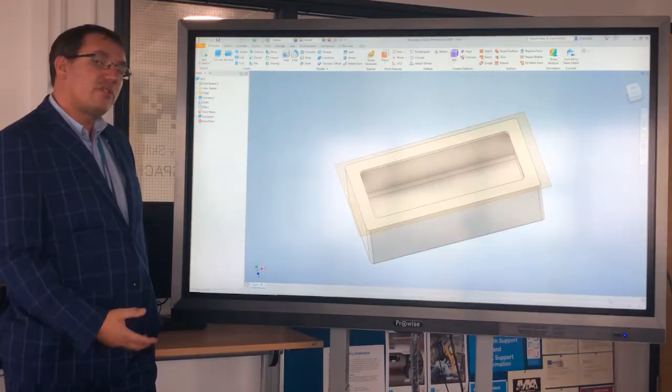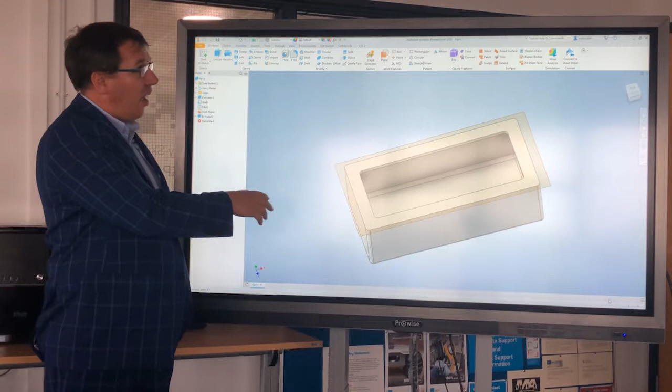Welcome to my first Inventor 2020 tutorial. In this tutorial we're going to look at how we created a simple box, shelled out the box, and then created a work plane on it for us to build a return flange. I'll show you one way—there's multiple ways of doing this, but I'll show you this basic simple way. We're also going to make this fully parametric and constrained so we can size it to whatever we want.

We're also going to look at how we utilize the model tree down the left hand side of the screen to keep track of what's going on in our model itself.

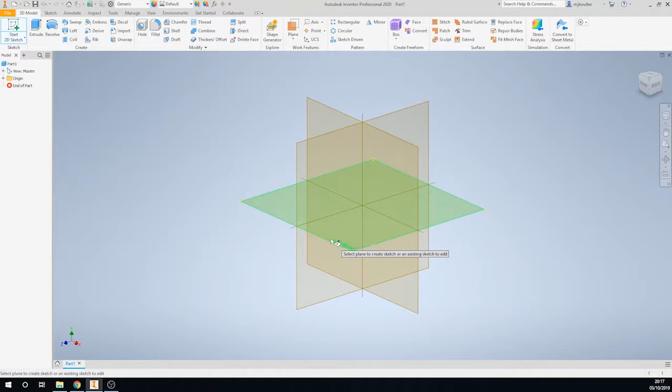So let's jump straight in, and we're going to create a two-dimensional drawing on the plane. Don't forget to revolve round so that horizontal is horizontal and vertical is vertical. We're going to create a simple box around the center point, and once completed, use the vertical constraint, finding the midpoint and constraining it to the center of the axis. We'll do the same with the horizontal plane, find the midpoint and constrain it to the center of the axis.

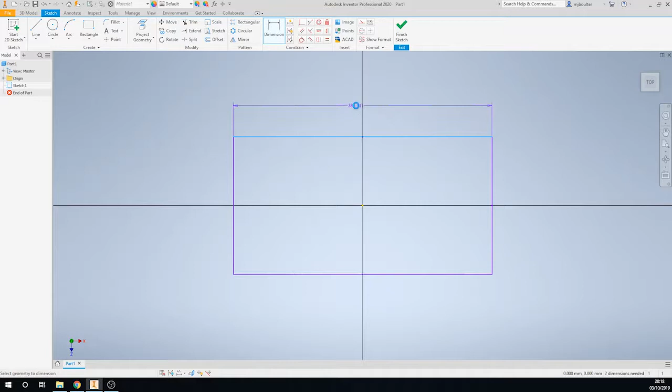We're now going to dimension the width, and I'm going to use the parameter width equals, and add the width that I want. Do the same with the height, calling it height equals, and add the length parameter that I want there.

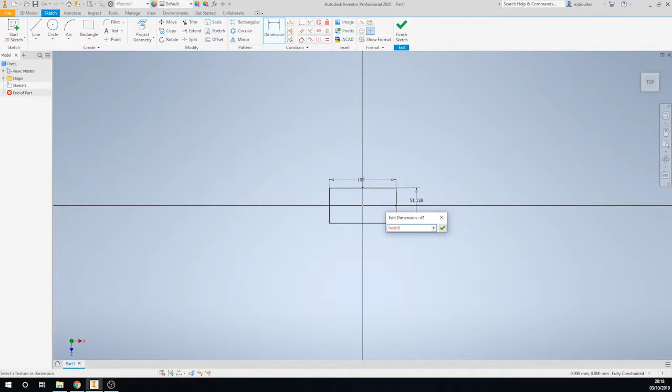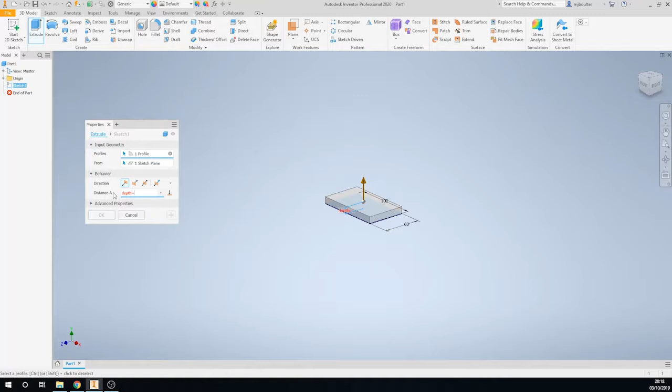Once we've done this, we can finish the sketch, and then extrude it. As it's only got one sketch, it knows it's going to extrude it, and we're going to extrude it to a depth equals, then the depth you want to extrude it to. Click OK, and there we have the extruded box.

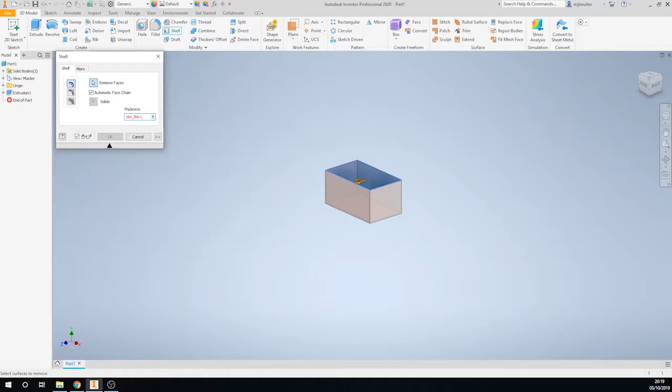We're now going to shell the box out. We're going to shell the interior of the box out to a skin thickness, SKN_THK for my abbreviation, and we're going to give it a skin thickness of 2mm, which is what our 3D printer is good for.

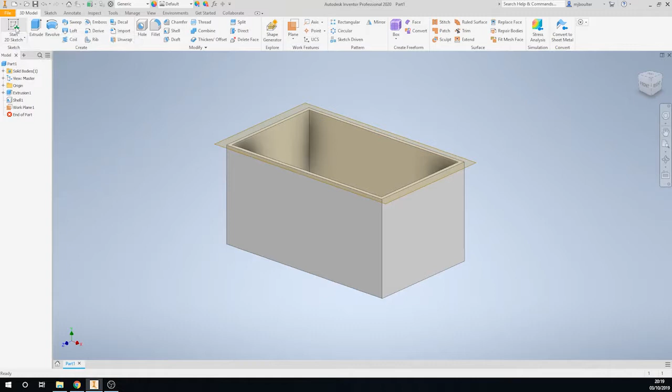We're now going to create a work plane across the top, selecting the two outside edges to create this work plane. Then we'll create another two-dimensional drawing on this work plane. The first thing we'll do is project all the inside edges through onto that work plane, and then offset them to a random measurement.

Because now what we're going to do is dimension that offset, and call it flange, because this is going to be our internal flange. So flange equals, we're going for 6mm.

We can finish that sketch, and extrude that flange section. We're going to invert the direction, and select from the list of parameters our skin thickness, so it's the same, and then click OK.

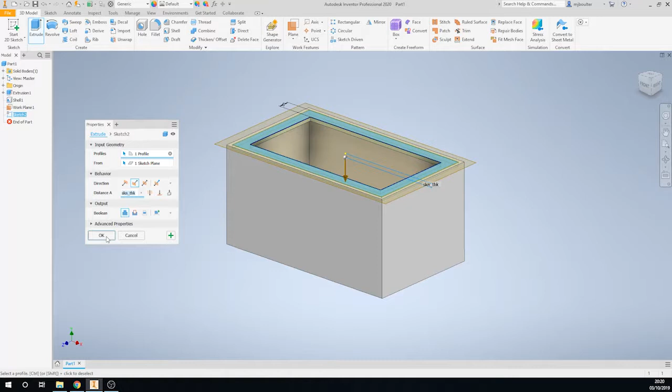So we're now going to do another two-dimensional sketch on that surface, and this time project the outside edges and project that geometry through to that plane. This is going to give us our lid.

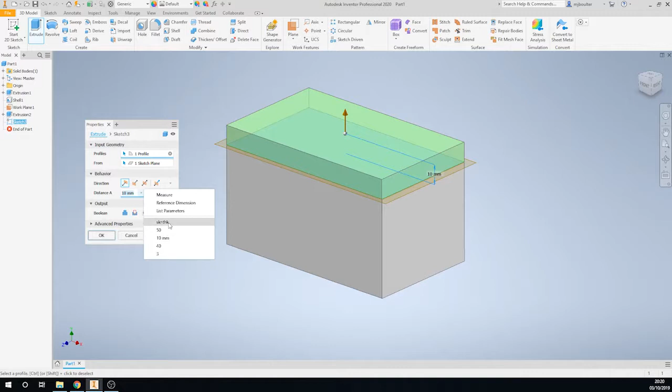So we'll finish that sketch, and extrude the lid. It's extruding the right way, but this time we're going to create it as a new solid, and give it the same parameter of the skin thickness. Click OK.

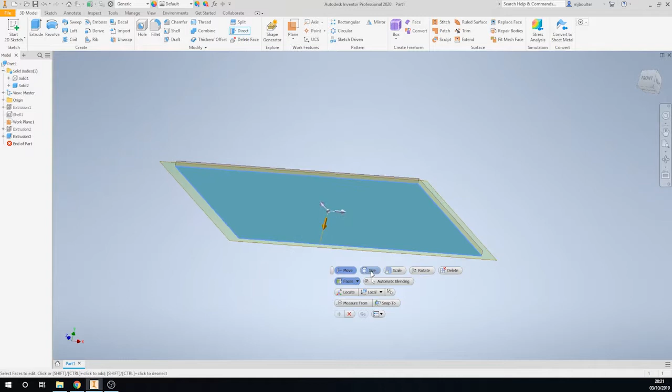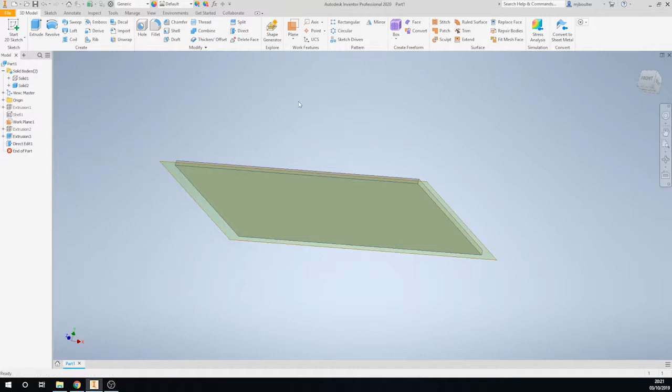We're going to turn off the original box solid, turn the visibility off, and rotate round to have a look underneath. We're going to use the direct function and push the surface back 0.2 of a mil using that little golden arrow, then create the parameter gap equals minus 0.2, because that's the gap our 3D printer needs. We'll cancel that, make the box visible again, and check that we've got a little gap running through the whole lot.

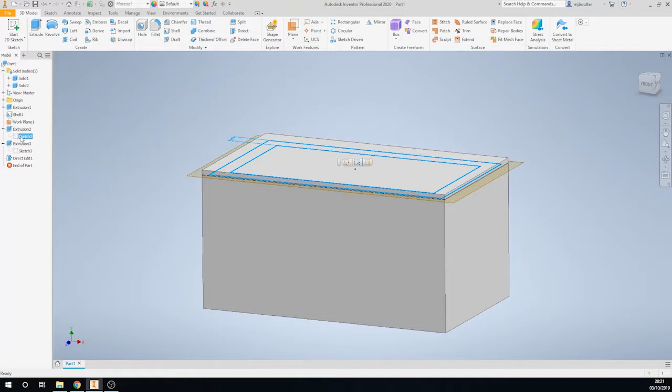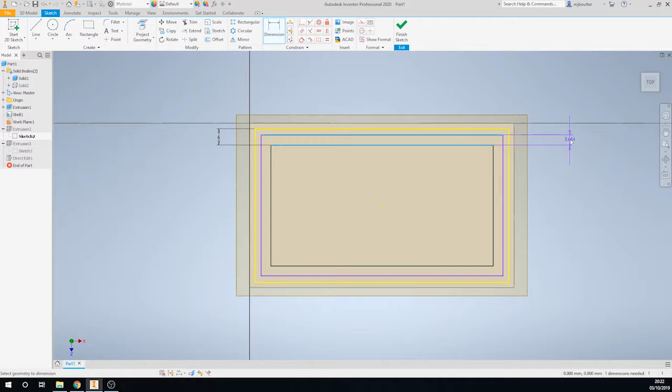We're going to make this sketch, the original flange offset sketch, visible, and edit it because we're now going to create the path for our O-ring to sit in. We'll offset the inside measurement by any random amount, because we're then going to dimension it as half the width of the flange. We can select the measurement from over here, divide by 2, and click OK, so that it will always be half the distance in from the flange.

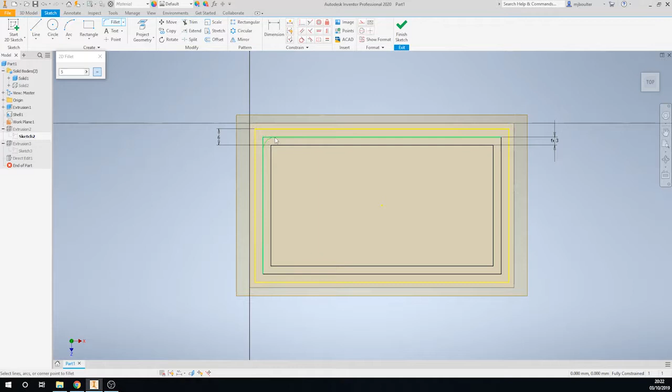We're going to put some radiuses around the corners so that the O-ring has a bit more of a chance of sitting round. So we'll put a 5mm radius on all of the corners that the path for the O-ring will sit, then finish that sketch.

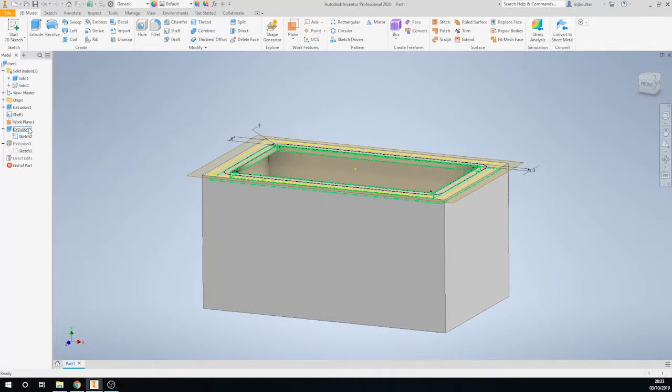We're going to hide the lid now, turning off its visibility, which will help us working on this sketch. We're going to make the mid-plane visible because we're going to start a sketch on that plane. We'll come down to the bottom and section it using the little button down there, which will give us this section view.

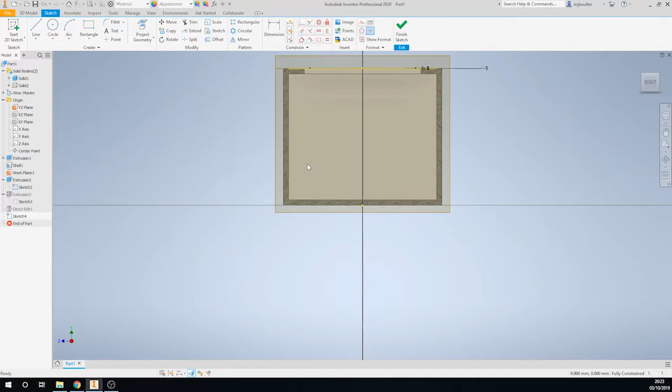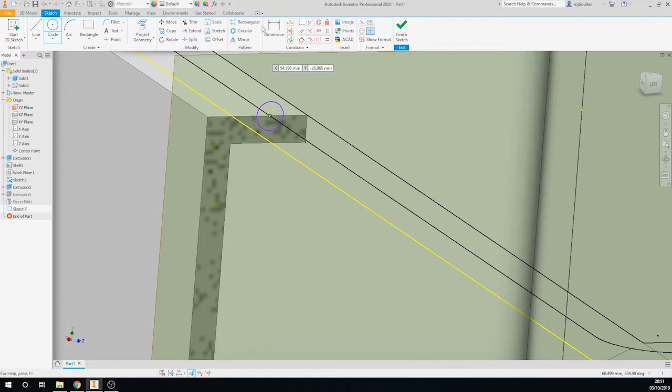I'm just going to rotate around the view so I've got a view of all the lines, and I'm going to project the path so that I can pick up the center point on the edge there so I can draw the circle. I'm going to give the radius of the circle 2mm.

Now we're ready to sweep this circle around the path. So we'll select the sweep, first select the actual circle, then come across and select the path we want it to travel. We're going to use the cut function so that it cuts out.

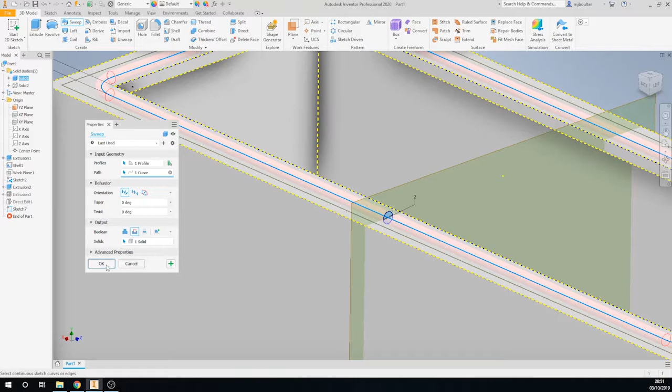I'll switch back on the lid, make that visible, and now I'm going to edit the sweep and add the second solid in so that we've now got the lid with the cut of the O-ring running in it.

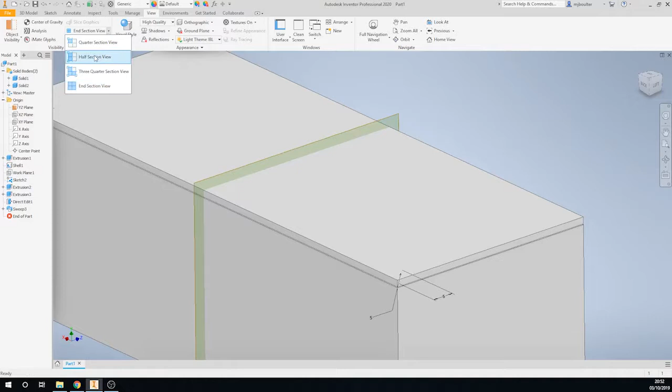I'm just going to double check using the view and the half section view. I'll check the one end, push the little golden arrow back, everything looks fine, click the red cross, and then do the same on the other side just to make sure that's happy. All looks fine there.

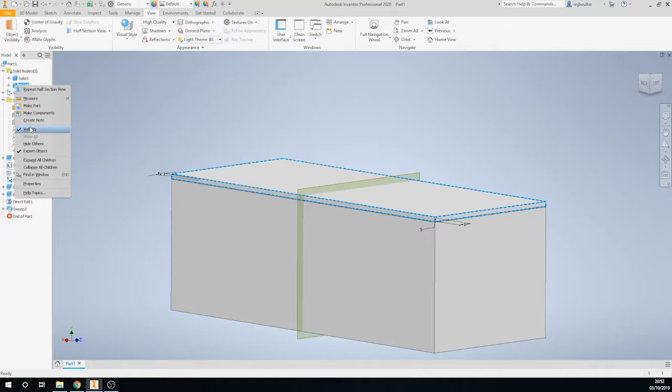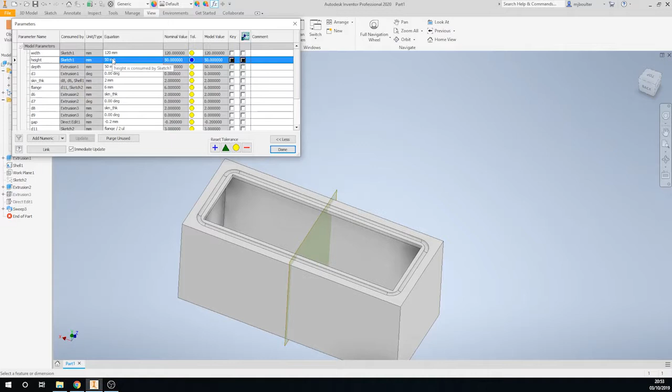Now I'm going to switch the visibility of the lid off because I'm going to check it for its parametric. I'll switch off the other drawings and sketches in the planes, and click the FX function button, which will give us all the measurements. I'm just going to change the length by a few millimeters, and the width by a few millimeters as well, making sure everything goes in the right direction so it's parametric.

Switch the lid back on to double check that, and there we have it. We've checked it, it is parametric, it is moving with the measurements.